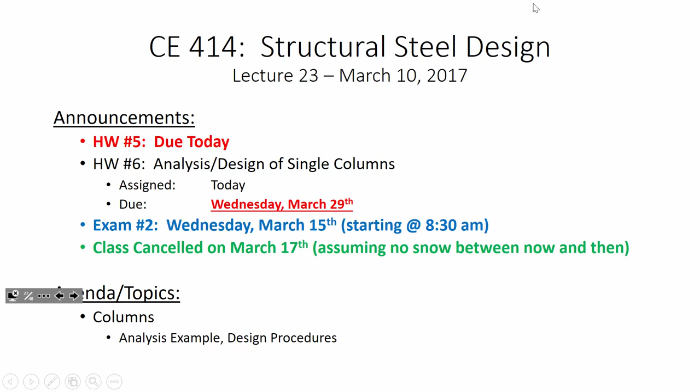Speaking of, let's talk about column strength. All right, any questions? All right.

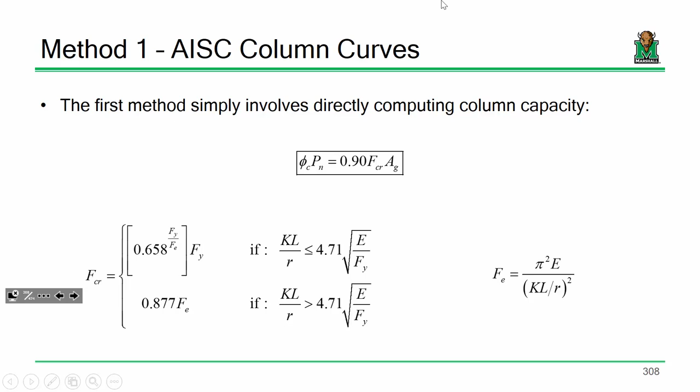Let's get back to this, because I really want to make a lot of headway today on column analysis and hopefully get into some column design. If you recall, what we've talked about with columns is the behavior, and we said there are two reasons why column behavior deviates from the theory. What's the first one? Imperfections and locked-in residual stresses. There you go. So the model you see here on this slide is intended to account for those effects: geometric imperfections and residual stresses.

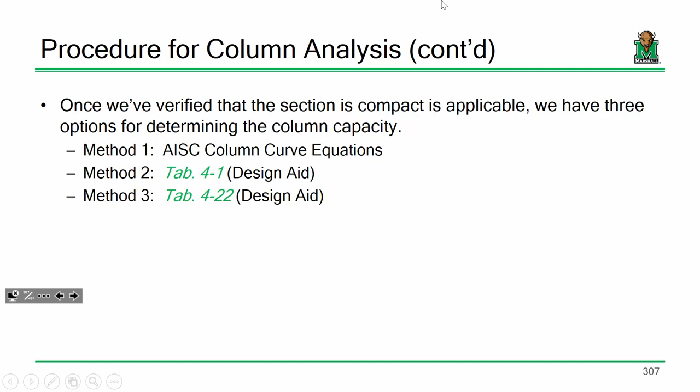Now there are three methods for computing column capacity: using the equations, and using a couple of the design aids. We're going to take the same column and calculate the capacity three different ways.

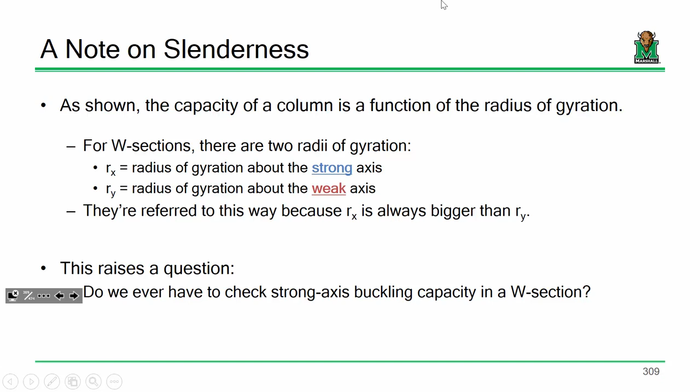One of the things we need to talk about right now before we get into the column, and I mentioned this last time, is a note on slenderness. If we're talking about a particular column, it's not about strong axis versus weak axis. I mean, yeah, you need to know the difference, but it's really about which direction has the largest slenderness value. When you compute a column's capacity, you are computing based on the largest KL over R. So if you have a column like this, you'd think Rx is always bigger than Ry, so all you need to check is the weak axis, but because KL over R may be bigger in one direction than another, you have to check the whole thing.

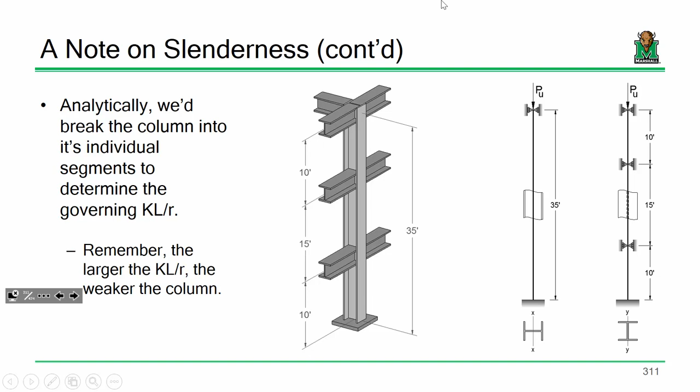We're going to take this column and split it up into an analytical model for the x-axis and the y-axis. Let's analyze this column: a W14 by 90, grade 50 steel, with strong axis bracing and weak axis bracing. We're going to determine the capacity three different ways.

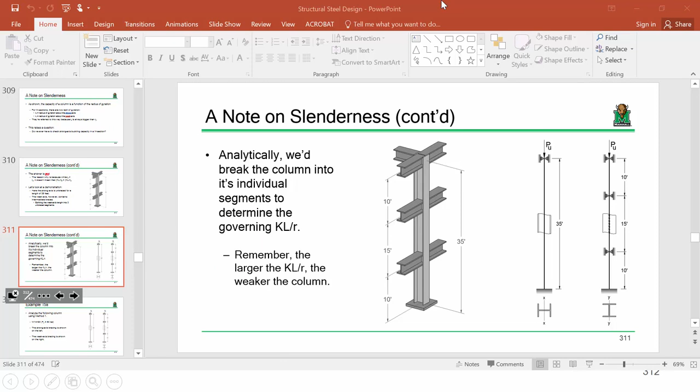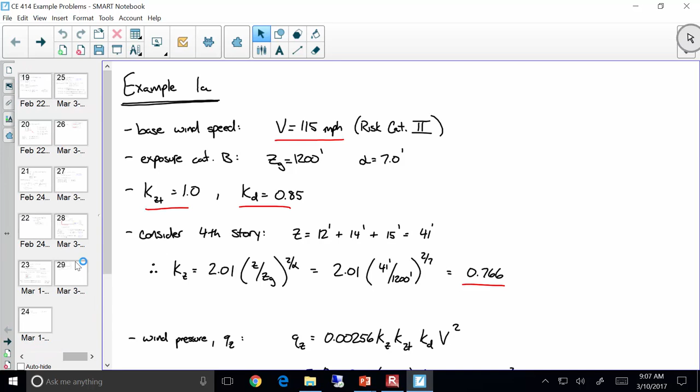Before we start doing the math, we're going to need some properties. I'm going to ask for a few properties on a W14 by 90, so bear with me while we wait for this to open. Everybody turn to table 1-1 because I'm going to need some properties for the W shape.

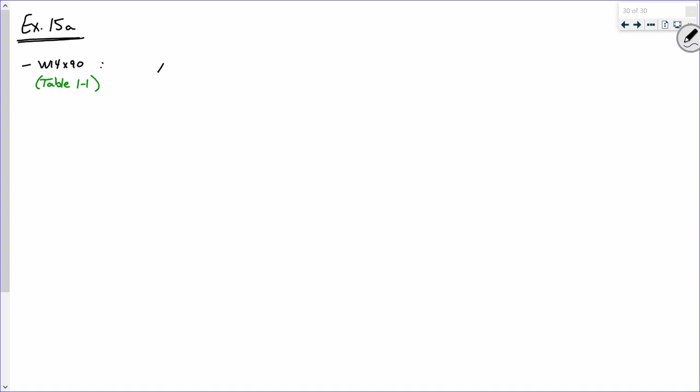So first thing I need are some properties for the W14 by 90. We're not computing these; from table 1-1, we're just looking them up. What is the gross area for a W14 by 90? 26.5. What is Rx? 6.14 inches. What is Ry? 3.7 inches. Now I'm also going to look up some new ones: lambda sub f, which is BF over 2TF. What is that? 10.2.

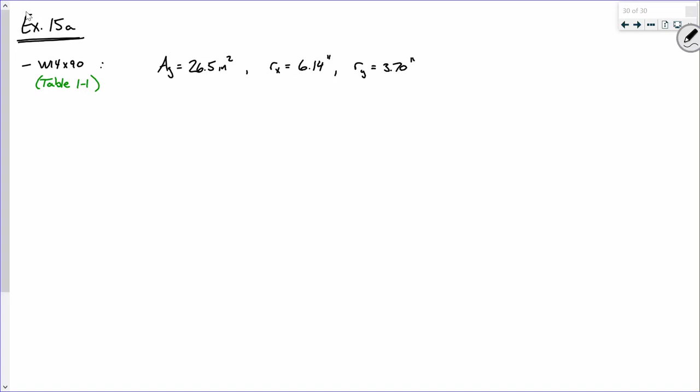And I'm going to look up lambda sub W, which is H over TW. 25.9. Sound good? So those two quantities are a measure of how flimsy, if you will, the flange and the web are. The larger those values are, the more flimsy the flange or web. So what I'm now going to ask is, are the flanges and webs too flimsy? I need to check those values against a given limit. Do you all remember the slenderness limits?

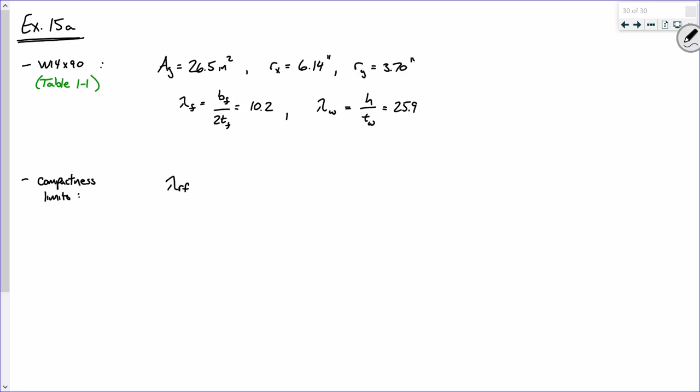Remember it was in Chapter B. It sort of looked something like this. What is the slenderness limit for a flange? I'll tell you the flange, and then you tell me the web. We're going to call these compactness limits. I'll give you the flange: it was 0.56 square root of E over Fy.

Did you all tab that? What's the page number? 16.1-16. I want everybody to turn to 16.1-16. Are you turning into 16?

Is everybody on 16.1-16? Does everybody see where I'm getting at? Y'all remember that now? On the page on the left, case 1. Okay, now if this is the one for the flange, tell me what is the one for the web. I want you to interpret the table.

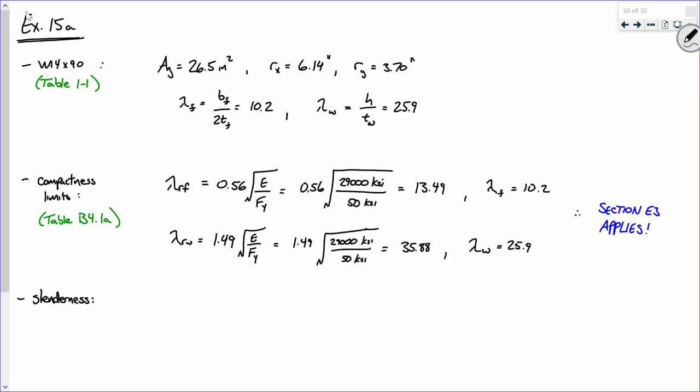Even if we did that, F sub E is a function of KL over R, so we still need the KL over R values.

Now, we talked about this last time. If we look at the x-axis, we have a single unbraced segment that's 35 feet long. But if we look at the y-axis, we've got 3 unbraced segments, 1, 2, and 3. So I'm going to handle each segment individually. Let's adopt a naming convention: we'll call this the X segment, and these the Y segments, Y1, Y2, and Y3.

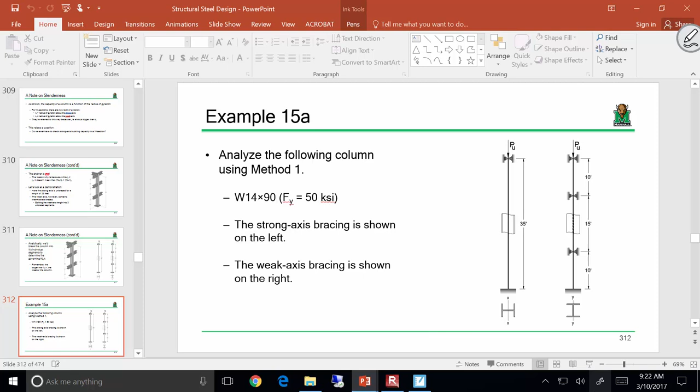So I'm going to draw a little table here, and let's see if we can figure this out. So: case, and we have the X case. There'll be 1, 2, 3, 4 more columns after this.

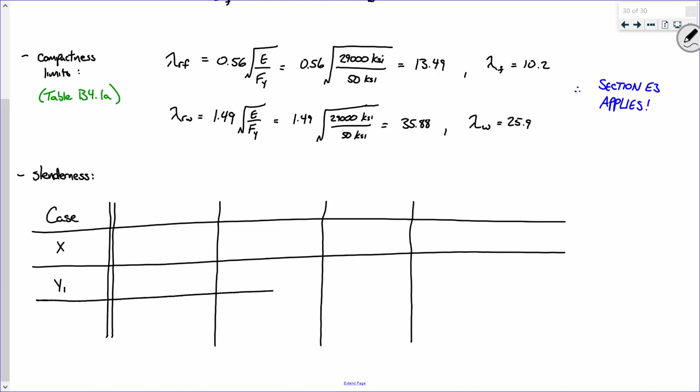So we have the X case, and then there were 3 Y cases: Y1, Y2, and Y3.

So to compute KL over R, we need 3 things: a K value, an L value, and an R value. We're going to take each of these one at a time: K, L, and R. Let's start off with the simple one, the R value.

For the X case, what's the R value? Trust the process. The question was, what is the R value across the x-axis? And it's Rx, 6.14. Now, that's not technically correct. It's 6.14 what? That matters.

For the y-axis, what are they? 3.7? There, okay.

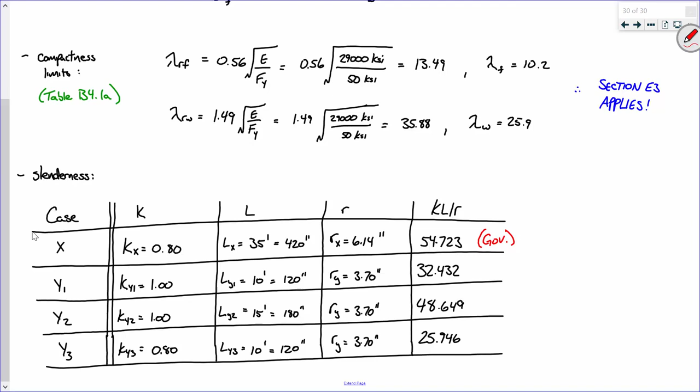Just bear with me. All right, if you understand what we've done so far, then using the equations in the manual are incredibly simple. Everybody got this? Okay, so...

Okay, to compute the column's capacity, we're going to take it one step at a time. So the first thing that we're going to compute is elastic buckling stress.

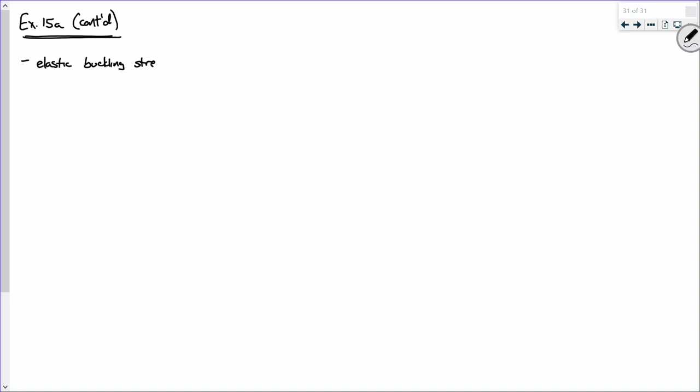Okay, so that is Fe equals pi squared E divided by KL over R squared. So that is pi squared times 29,000 KSI divided by, now what's KL over R? 54... there we go, 54.723. But we take that quantity and square it. So don't forget to do that.

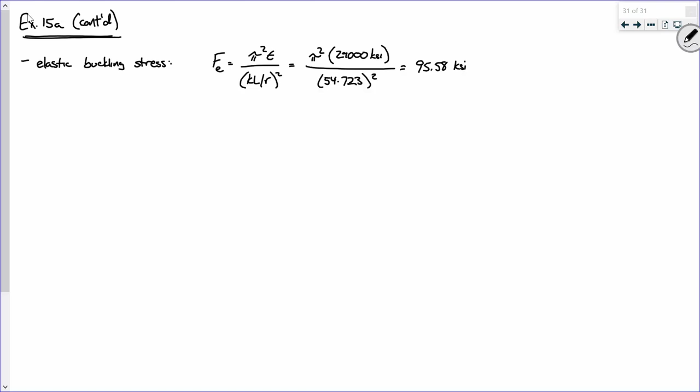So what do we get? 95.5, so we'll say 95.58 KSI. That is not the maximum stress that this section can handle. I mean, it's only grade 50 steel, so we know it's lower than that. That is just a useful parameter for what's coming later. Is everybody with me on this? Everybody good?

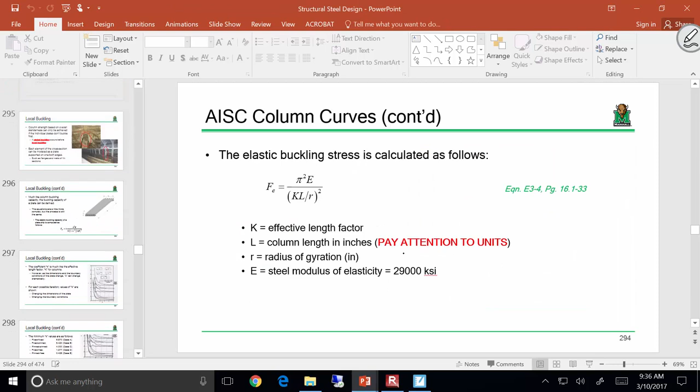Okay, now which equation do I use? Well, it depends on whether or not KL over R is bigger or smaller than that, right? So let's compute that, okay? Here's what I'm going to do. I'm going to say, we'll call this critical buckling stress.

So KL over R is 54.723, and 4.71 square root of E over Fy is 4.71 square root of 29,000 over 50 KSI and KSI, which is what? 113.4, something like that, right?

So, based on these two numbers, you tell me, how do I compute F critical? I'm not going to pull it up. I'm going to make y'all do some work. What's that? The equation on the left. Now, what's the equation on the left? I think you did that part. I thought you were saying like just use the correct equation.

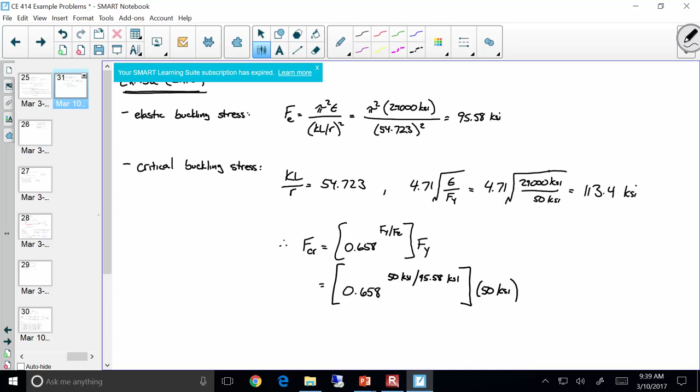That's 95.58. Is that? Has everybody got this? Okay. All right, if you've got this, then therefore our design capacity. All right. Phi PN is phi times, all right, so first off, what's phi for columns?

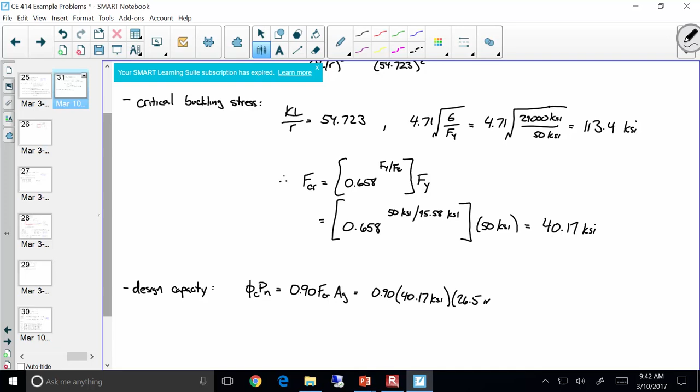All right, so 0.9 times F critical times AG, so 0.9 times 40.17 KSI times, what's AG? All right, there we go. So phi PN is what? So phi C, so instead of phi sub T for tension, phi sub C for compression. What is this? Yes, point what? 958.1? So 958.1.

Now hold on guys, I know you all are hyper, and it's Friday and it's rainy. Is ever... well, not, it took a while. We got to maintain some focus here. So are we good? Does anybody have any questions? I'm saying this is important.

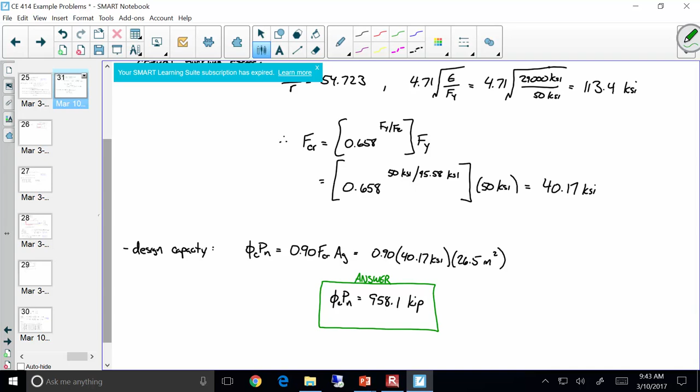Okay, that was this. Okay, that was this right here. Okay, we computed the limiting slenderness value and then compared that against the slenderness for the flanges and the web. These values are these? Yes. You'd still use E7. Yes, because that means you have a slender element. That won't happen. No, seriously, that won't happen.

All right, any questions? Okay. Now, this is important, okay? I want to pop quiz you on something. Which axis governed this column? Okay, all right.

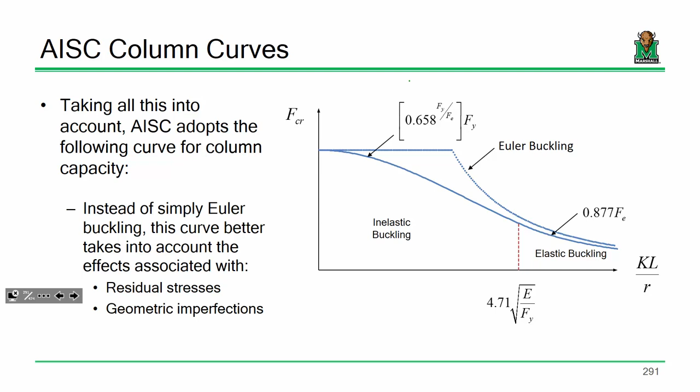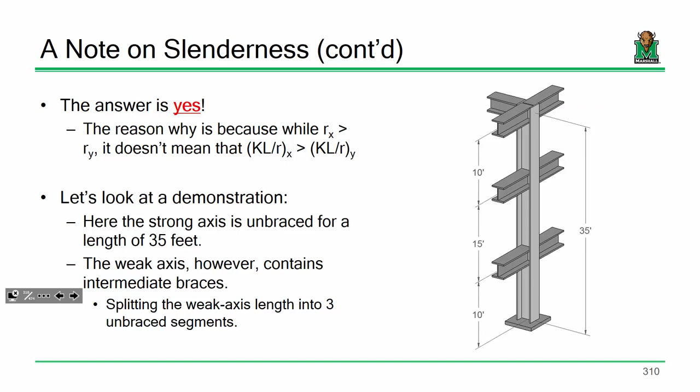Does anybody have any questions about this example? Okay, the next method is to use the column capacity table. Turn to this - if you haven't tabbed it, you need to do so. We're on 4-12. This is a very important table for the use of design. This table will tell us, based on the length of a given column, the capacity.

Now, the length is very important. I want somebody to read what it says right here - you have to use your manual, you can't read it off the slide. What does it say? Effective length KL, with respect to least radius of gyration, R. R what? Y. Okay, so let's be clear.

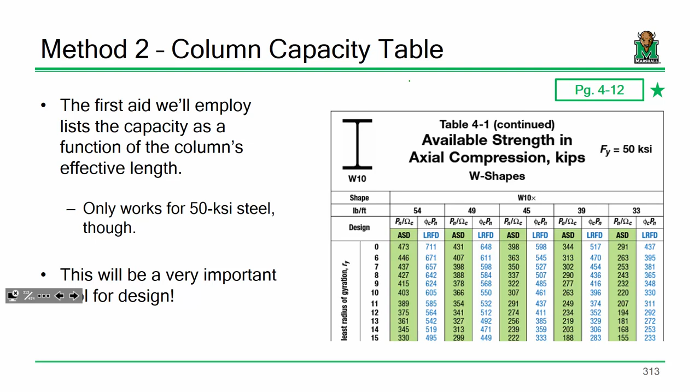This table was generated based on the assumption that the y-axis, or the weak axis, governed. Is that the case for this column? No. So we have to do something a little different in order to use this table.

First off, in order to use this table, we need the ability to linearly interpolate, which I hope everybody here is an expert at - right? Oh, come on, you can do it. Okay, let me explain how we go about this.

This table was written based on the assumption that the y-axis governs. That's not the case for this column - the strong axis governs. So what I'm going to do is try to compute an effective length that we can use for this table. The way this table works is you have a given KL value, and based on that KL value, you look up the capacity.

Now, if the weak axis governs, it's simple - if it's KL of 14 feet, find 14, and there's your capacity. But if the strong axis governs, we're going to transform it a little. We take that KL and divide it by the ratio of Rx over Ry. I came up with that by setting KL over R in the x-direction equal to KL over R in the y-direction and solving for that.

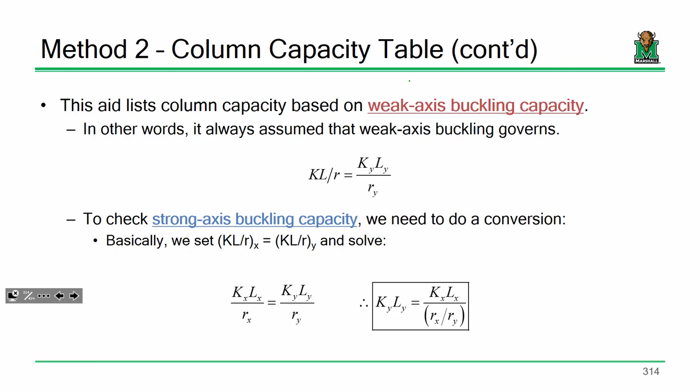Now look at the bottom of the table - what do you see? Rx over Ry listed, everybody see that? So for this column, we're going to check it using the table. To be clear on how this works: if the weak axis governs, just go into the table with KL. But if the strong axis governs, go into the table with KL divided by the ratio of Rx over Ry. Everybody okay on that?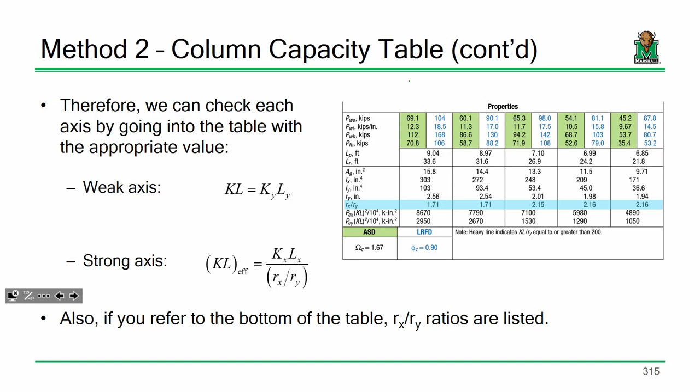Don't worry, we're going to try it out on this. Let's see what happens when we use this table - we can finish this pretty quickly.

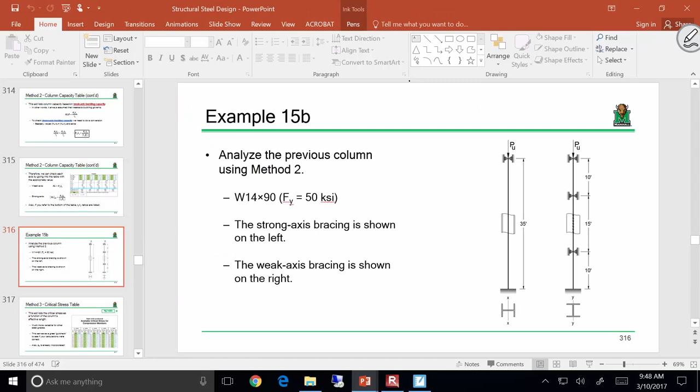15B. Guys, got to maintain some semblance of order. All right, so...

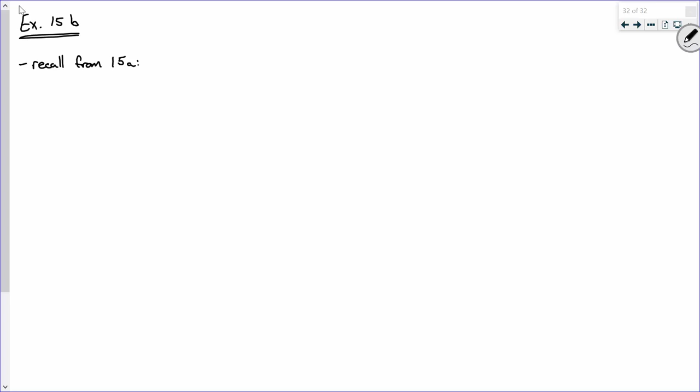Let's recall from 15A. We said that for 15A, first off, what's the section? 14 by 90. What was the K value for the direction that governed? K was 0.8. What was the length? It was 420 inches, right? But if you notice, the lengths in that table are listed in feet. So what I'm going to say is this: it was a W14 by 90.

KX was 0.8, and the length was 35 feet. Sound good?

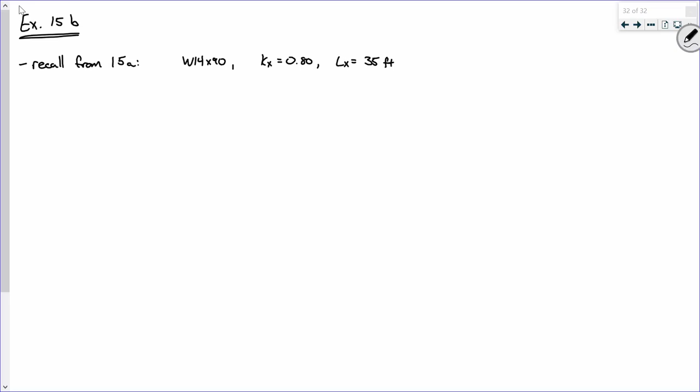Since this is a W14 by 90, help me out. What's the Rx over Ry going to be? So what that means is you're going to have to find the Rx over Ry for a W14 by 90. And what is it? 1.66, you said? Okay.

So Rx over Ry is 1.66, and you got that from table 4-1. Is everybody with me? What's that? Do you know where the W14 by 90 is? You're on W14 by like 370. You need to turn. Oh, okay. I didn't know. So W14 by 90, and then down.

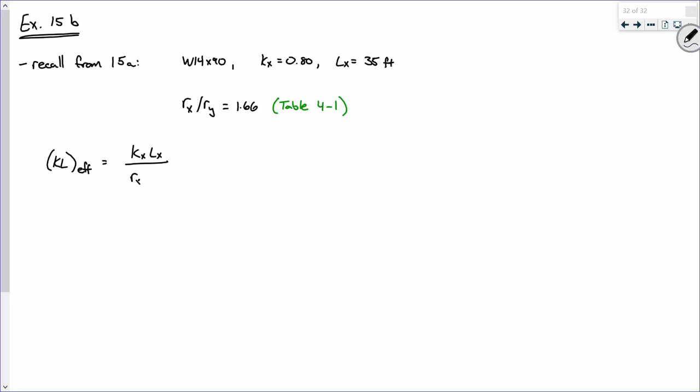All right, now what I'm going to do is I'm going to compute an effective KL. I'll admit it's probably not the best name because it's like an effective length, but that's sort of what I'm calling it. So KX LX over RX over RY. All right, so help me out.

What's KX? Make sure y'all pay attention. 35 feet over 1.66. Okay, and what do we get? 16.87, you said? So,

Everybody with me on that? Okay, so if I go into this table, I need to use some linear interpolation, right? Is there a value for a length of 16.87 feet? No, but possibly you get something in between, because we can linearly interpolate.

And first off, to be conservative would be to round up to the 17 feet, but here's the thing: the purpose of doing this is to see if we get the same capacity. You're not going to get the same capacity unless you go through and do the math. Does that make sense? So in the homework you want to linearly interpolate? Yeah, I do. All right.

Okay, so we're not going to be able to look up a value for 16.87 feet, but what are we going to be able to look up? 16 and 17. Okay, so what is phi PN for a KL of 16 feet, and what is phi PN for KL of 17 feet? So what's the 16 feet? 979. All right, and what's the 17?